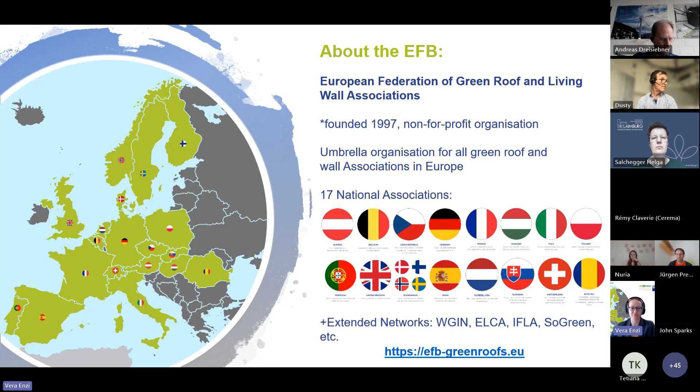General basic goals of the EFB: speak about what's going on in our sector across Europe, and help each other from country to country. We have different advancement statuses - some people are really doing pioneering work in the sector, others can easily take this information. This is one of the basic reasons why we started our webinar series, to get the information we handle internally out to members of our members and beyond.

So I'm approaching a term definition - now we're getting serious for today. Today's webinar is about delivering for the biodiversity and climate crisis. We are going to take a look rather at the left concept that you see on the screen than the right concept, but of course you will see biosolar roofs as well as solar green roofs today, as far as I am informed by the presentations. So what's the difference? We are going to discuss it also later with our experts.

In general, we can say a biosolar roof is the combination of a biodiverse green roof with solar use - it can be photovoltaics, or also solar thermal. A solar green roof, on the contrary, is the combination of a standard extensive green roof with solar, or in some cases solar thermal. That's my opening, but of course we can discuss if this definition stands, or we can further improve it during the talks.

So happy to introduce today's speakers, and very happy to let the first speaker go afterwards immediately. Today here, Dusty Gedge, EFB ambassador, after serving voluntarily as EFB president for 16 years - great that you're here today. Dusty is an independent green roof and biodiversity consultant, and today he's also going to talk about his company Gentian a little bit. What you should also know about him is that he is a professional ornithologist and ecologist, and this is also actually what he loves doing most - watching birds on green roofs.

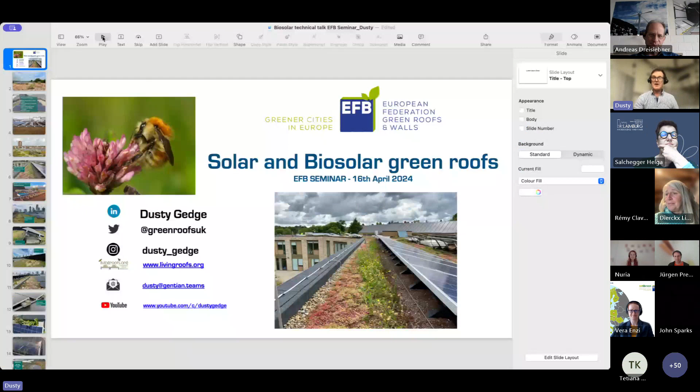So let's press play. I hope you can see that. So yeah, I'm just going to go through solar and biosolar green roofs, the difference. And there were a number of questions about retrofit and how you could assess cities, which I'm going to cover. But this is one I was involved with specifying and designing, and this is a biosolar roof up in North London. And you can see the mix of wildflowers, and you can see also some sedums. And I'm going to get into detail about that.

And the key points of the discussion: what's the difference between a solar green roof and a biosolar green roof? Why is that important? I'm also going to talk about non-integrated and integrated systems, which is pretty relevant across most of Europe, less so in the German-speaking world, but is particularly of interest beyond our shores. I'm going to talk about some of the main engineering issues, and key in my experience is who runs the design and the installation. And I'm going to talk about some retrofit projects that I've been involved with.

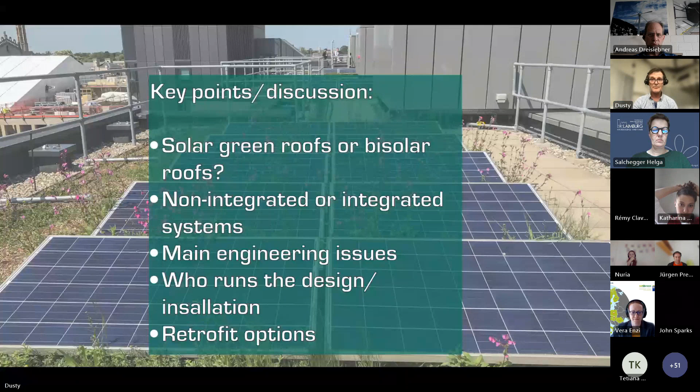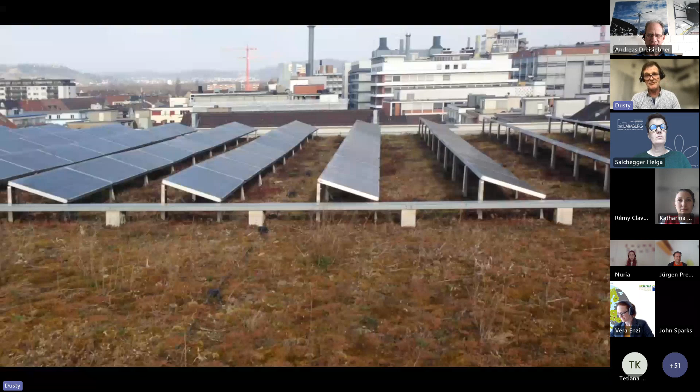So I've got to say, because Andreas is here, my first solar green roof was back in 2002, which is the Messe Hall in Basel in Switzerland. And what's interesting about this project, it was originally just a sedum roof with some solar panels on it, but my colleagues at the Hochschule Wädenswil decided to turn it into a roof that could deliver better for biodiversity. I'm sorry about the quality of the picture, but it was taken a long time ago, I think about 2004. And it was really my colleagues at Hochschule Wädenswil who coined the term biosolar. And I've got to give credit to them.

And often now, 20 odd years on, everybody just thinks a biosolar green roof is solar panels on a green roof. It's very specific about biodiversity. And biosolar roofs deliver both renewable energy and what I call meaningful biodiversity. All green roofs provide value to nature because they're green space. And here you can see that we've got some native wildflowers at the rear of these panels, as well as sedums. And that is the point of the biosolar.

And biosolar roofs in the main, and I'll come to the slight difference there, are what I call, and certainly in the GRO Code are called, integrated systems. And it's where the green roof, the solar arrays and their mounting systems are integrated into the green roof system. And therefore the green roof system provides the wind ballast and the lateral ballasting, which is needed to make sure that the panels don't blow away, essentially. And wind loading is a very important topic.

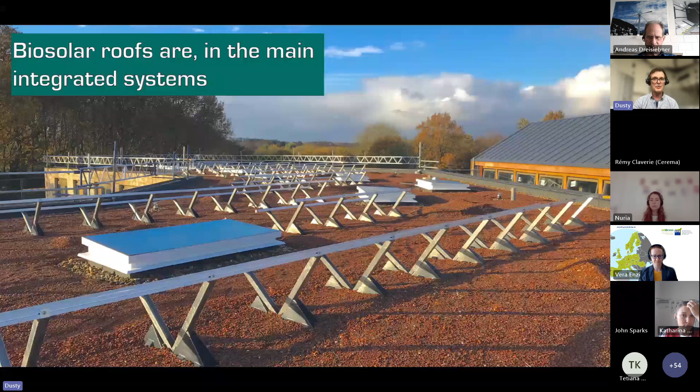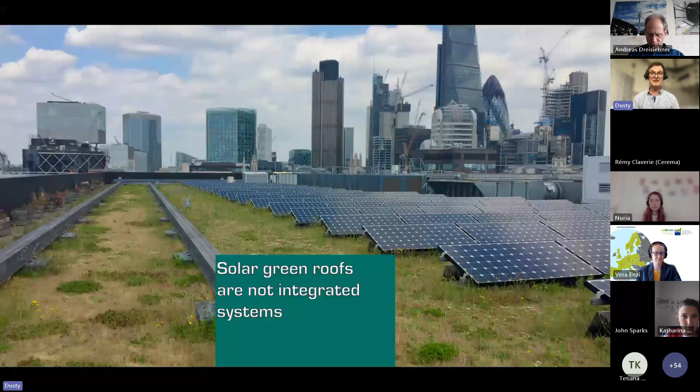Now, this is actually a solar green roof originally, and it's not integrated into the green roof system, but this is a bank in London where a very interesting man started to retrofit features onto this system that really makes it a biosolar roof. But originally it was a solar green roof, and you can see here where it's non-integrated, the solar mounts have to be ballasted with paving or shingle ballast to actually hold them in place in terms of wind loading.

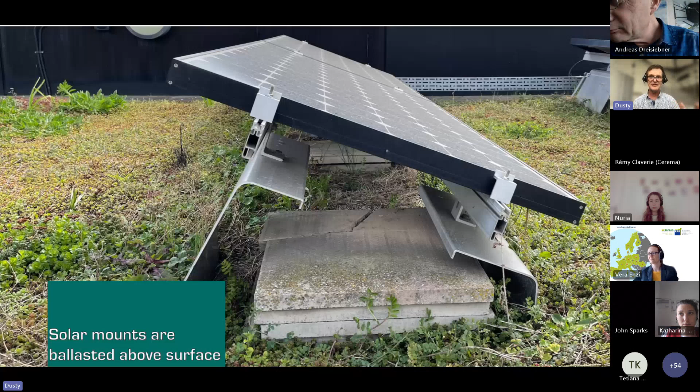And that is a very important difference, because integrated systems are generally run by green roof system suppliers with solar. But what happens is people want a green roof and then they decide they want solar. So they go out to solar and then solar put these on. And my experience is it's best that you get a process, like what Andreas does in Switzerland, that is run by a combination of the green roof system and the solar system supplier.

And as you can see, they've retrofitted these features on this solar green roof, these sand mounds, and put native wildflowers in. And I didn't put pictures in, but this is quite a famous roof now in the UK because it's got several orchid species. And one of those orchid species is actually from southern Portugal, southern France, which blew in in 2021.

And has only ever been once found in England, which is a very interesting, exciting story. And you can Google about that. And you can see again lots of wildflowers mixing in with the sedums. So this solar green roof has been transformed into a biosolar.

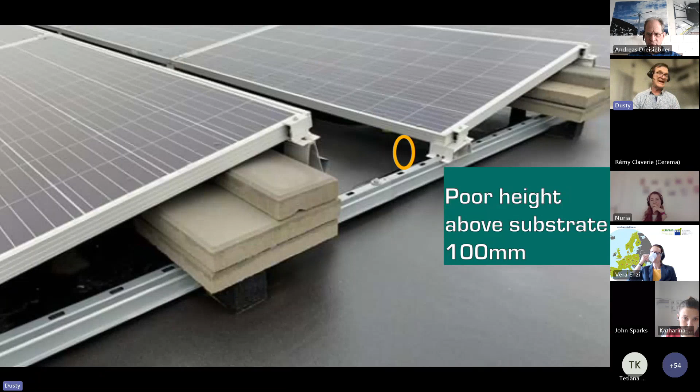And one of the other problems when you get these non-integrated systems, these are systems which are generally put on conventional roofs, is you often get a poor height above the substrate. Now, I'm confronting this a lot at the moment because the Department of Education wants all schools to have biosolar green roofs, and contractors are coming up with simple systems. And what happens here certainly is that actually this can encourage the growth of woody stem plants, particularly willows and trees, which can cause a maintenance problem.

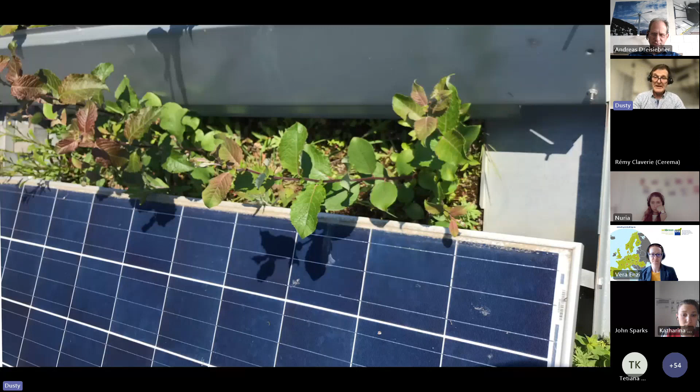And often when a green roof is designed, this particular roof was designed originally for solar, but the planning conditions said, oh, you need a green roof. So they sort of packed the green roof around it. And basically, they never produced any solar panel power because of this buddleia clouding out the array. Now, this is not because of the green roof. It's just a very bad design. And so using the incorrect solar mounting system can actually cause problems in terms of generating solar energy. And I'll come to the compromise that needs to be made later.

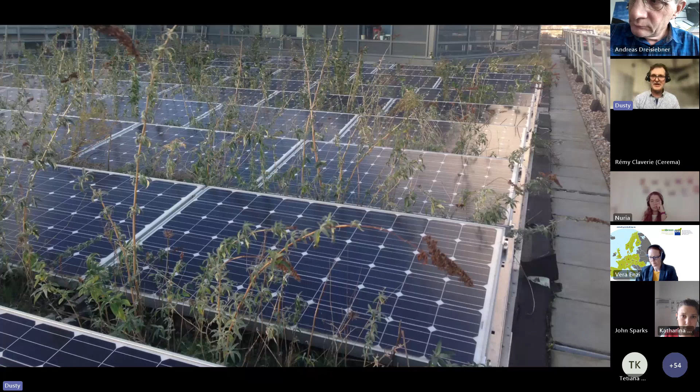Often I get asked about orientation. Generally, certainly in the UK, and actually most of the green roofs that I've seen, a north-south is often preferred. But actually, an east-west orientation does produce more energy, from what I understand. And what you can see on this one in Switzerland, again down in Sins, which I visited with Vera in 2014, you can see an east-west array, and in the far distance, a north-south array. And that can produce issues depending on the aspect, that actually a north-south is preferred because of shading by other buildings. And these east-west panels are also not integrated. They've been ballasted. But this gets into a lot of detail, which may come up in the discussions.

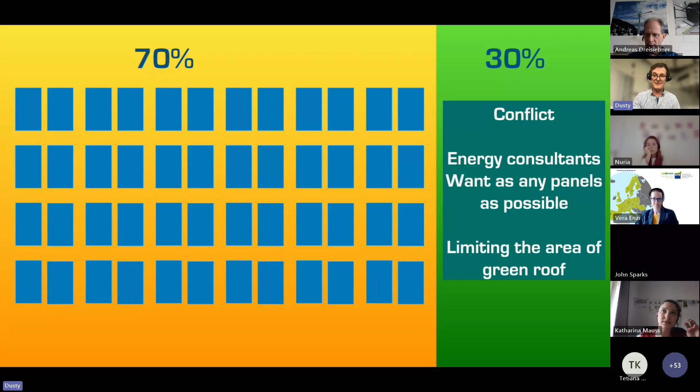One of the main conflicts we're having is that the solar guys and girls want 70% of the roof to maximize the amount of solar energy that they can produce on the roof using pitched, angled panels. And that means there's only 30% left for biodiversity. And one of the compromises that needs to happen if you want to make a really good biosolar green roof is that, for me, you need 50%. But in my code in the UK, we go for 40%.

And that means you can't necessarily generate as much electricity as you would want to, or could do from a roof. But we've got to think about the other benefits that the green roof is providing in terms of biodiversity, water storage, and cooling, which I'm sure Andreas will come to. But this is a compromise that we need to be aware of, else you get bad solar roofs fitted onto a green roof, and they don't actually produce any energy at all.

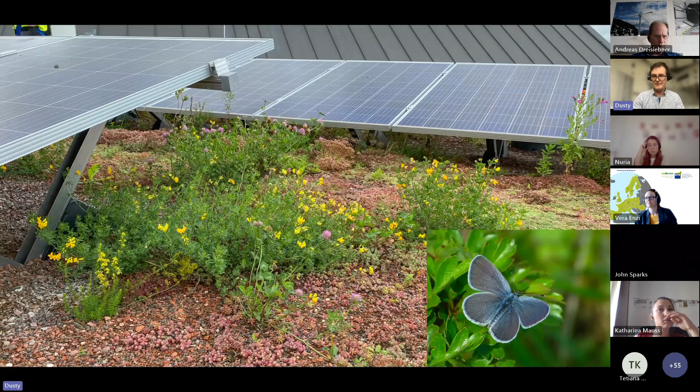Now, for me, certainly the roof that I showed you at the start, this roof, Barnet, is the first roof officially where a very rare butterfly in the UK has got a really strong colony, which is the small blue. And so the point there, we can actually deliver meaningful biodiversity. The yellow plant that you can see there is its food plant, which is the purpose of a biosolar roof.

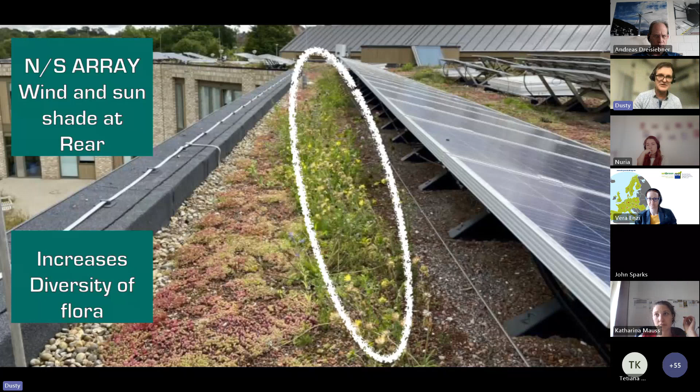And you can see here on this north-south array, as I showed you earlier, what happens on a biosolar roof with pitched panels is you get this wind and sunshade, which means you get an increase in diversity of the flower species because they are out of direct sunlight and particularly out of the wind, and therefore you get more vigorous growth, which gives us our biodiversity, which has been the focus of most of my work for the last 27 years. It gives topographical variety.

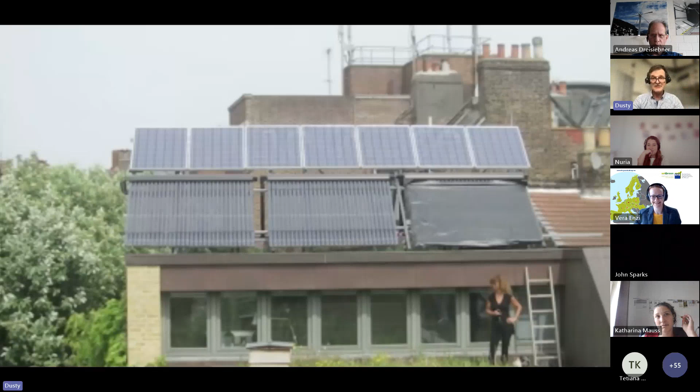Now, I've got some terrible pictures here because this is very exciting, and I know Vera is very interested. This was actually originally just a solar thermal roof, and then my colleague Justin Beer added some solar energy panels above. And I took this picture in 2011. It was a spring drought, and it's very unusual in Europe to have a spring drought.

There's a spring drought in Belgium as well. And what happened with the solar thermal, these evacuated tubes, they allowed the rain to get in when the rain came, but they shaded the roof so it didn't evaporate so much. So this roof actually really survived the 3-month drought we had from February through till May.

And again, I'm very interested in this solar thermal process. And if you're interested in this, I took these pictures from a video I made. I think it was in 2011, so it's up there if you want to find out more about it. And you can see here the plants will grow up through the evacuated tubes and have no impact on the production of the hot water that these tubes are meant to produce.

But essentially, one of the things that is known, and I know from a document that was given to me in 1999 from the city of Karlsruhe, is that actually when you've got vegetation and soil on a roof, it can actually help cool the panels down because they can get quite hot in the summertime and make them more efficient.

And I know one of the questions, is there any research on this? There's been recent research, I think it was about 3 years ago, in Sydney that shows there's about a 3.8% increase in energy production when a solar panel is placed upon a green roof. But again, I'm sure Andreas will go into how he's producing 10% more, because I know about that.

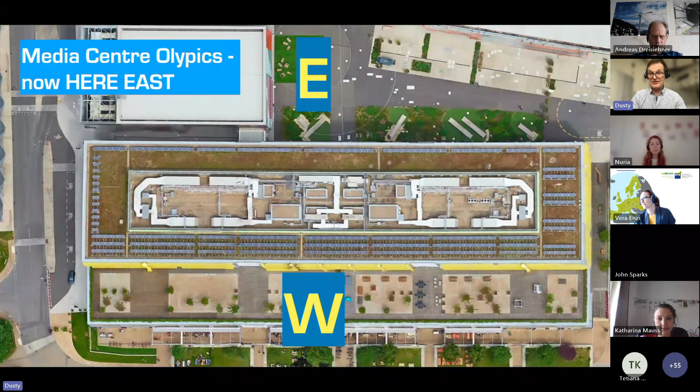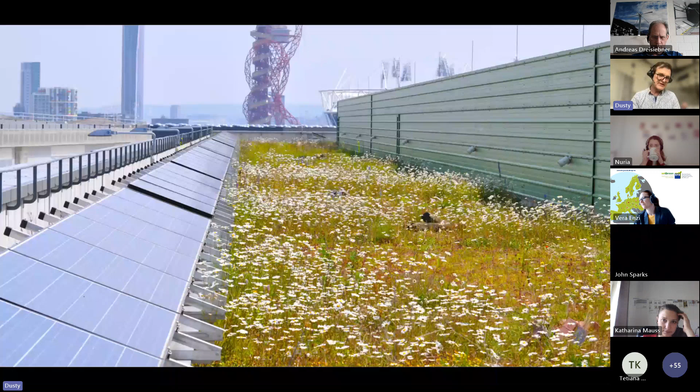A quick couple of retrofits. This wasn't a retrofit. I put this in first of all. This was the Olympics Media Centre back in 2012 in London. It's the largest solar green roof in London. And originally it was just meant to be a green roof for biodiversity. And unfortunately they were missing their solar target. So they forced solar panels onto it. And it's actually a very weird construction.

But the point here is this roof has actually met, out of the 12 biodiversity targets, 9 of them, which even the Olympic Park does not achieve. And in fact, it's got breeding birds underneath the panels. So that's actually to celebrate how we can deliver biodiversity using panels.

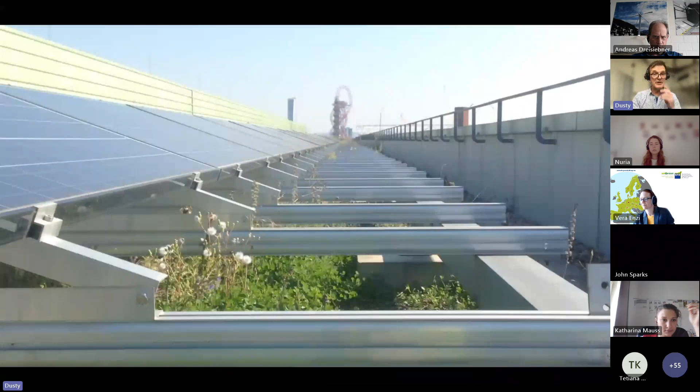So this is the David Attenborough Centre. We had a weight constraint here of only 100 kgs per square metre. And therefore, the architects decided to use a non-integrated system. And it actually works reasonably well, but there's a maintenance issue because of the woody stem plants. And you can see where the solar panels are. The building on the left is actually a new build, but the building in the main is the David Attenborough Centre. And that was a 1960s building which had pretty weak loads.

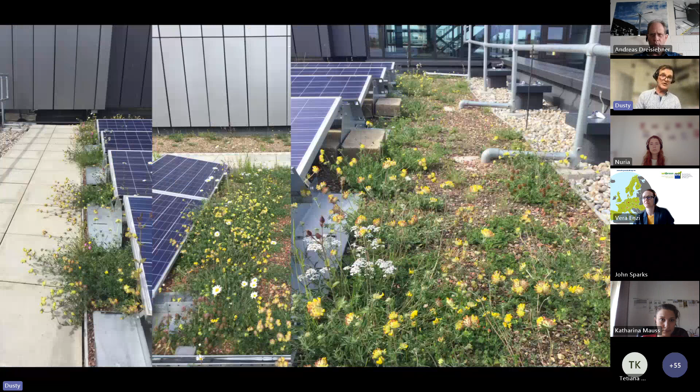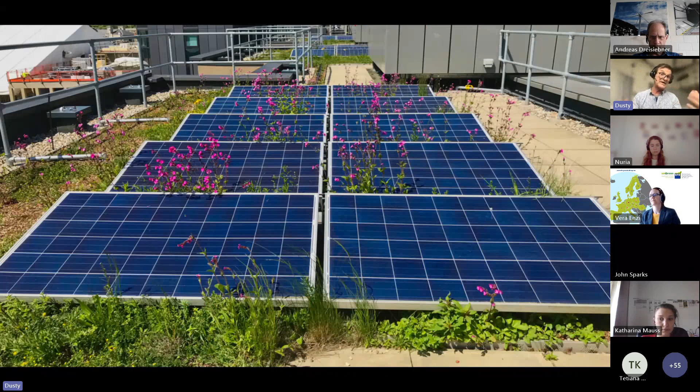But you can see actually we got a lot of good wildflowers growing, and even the wildflowers are growing up in front of the panels, but they haven't had any impact on the panels. It's actually the woody stem plants that have impacts on the panels, and they need to be weeded out. And maintenance is far more a problem on these non-integrated systems than on integrated systems.

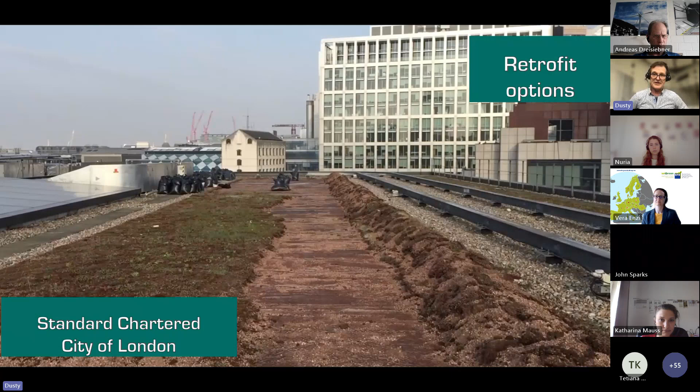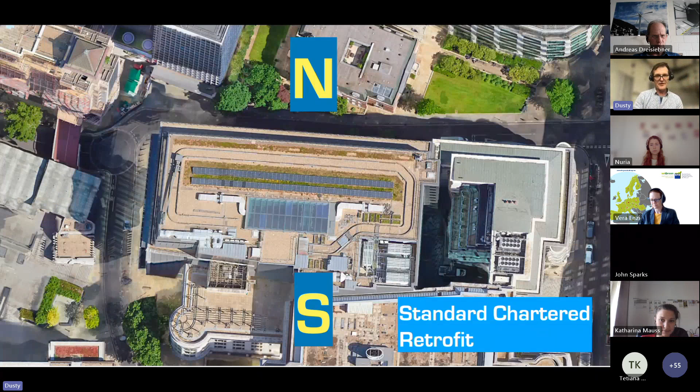So this is another retrofit, which was originally an 80 mil sedum roof on Standard Chartered, which is right in the centre of the City of London. And this is during construction. They removed the sedum, and then they added it. Sorry, I got out of turn. So there you can see the roof from Google. But what they did is then they added these integrated panels from one of, at the time, only 2 suppliers of these panels. This one's particularly ZinCo. And then they added substrate.

And what happened? The solar guys came in, added the panels, and what happens now is this roof has got much better biodiversity than it had before, because it was a pretty poor sedum roof. And therefore, the question of solar or biodiversity, if it's done correctly, you can actually benefit both systems. And actually, these are probably producing about 3.5% more electricity than was anticipated, the facility manager tells me.

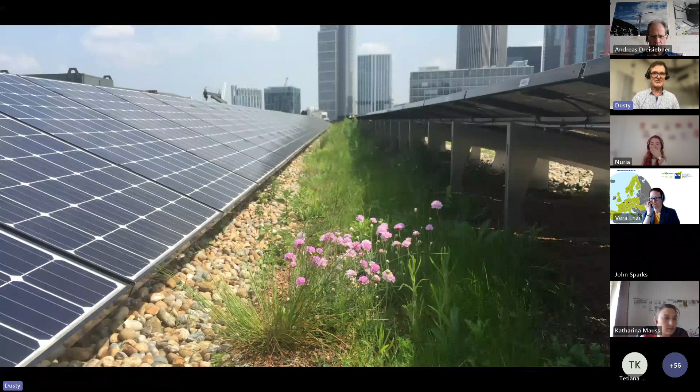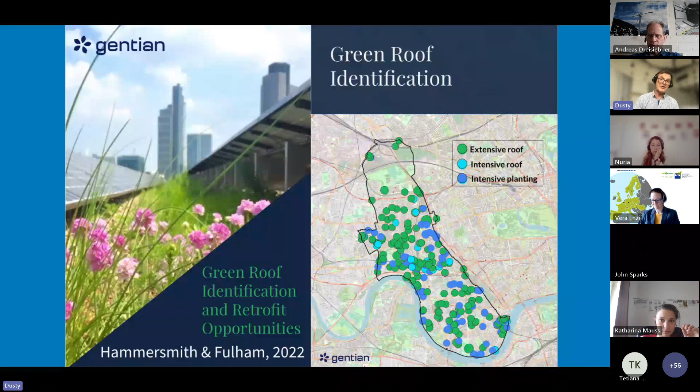Very quickly, somebody asked about mapping. I've done a lot of mapping manually in my life, but I've set up a company to do it. We did some work in the London Borough of Hammersmith and Fulham, which is an inner London borough, where we mapped all the green roof opportunities, we mapped all the retrofit opportunities, and we also did some work that I'd done from another London borough. We worked out where there were biosolar opportunities to put reasonably good biosolar roofs up, and what energy could be produced over the London Borough of Hammersmith and Fulham, which is about 25 square kilometres in terms of land area.

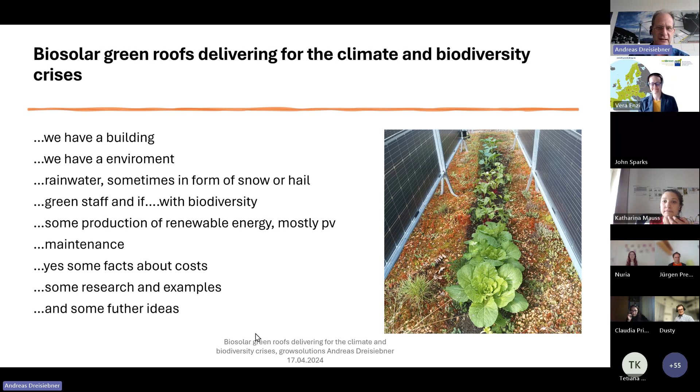Let's show you a little video, why, it explains a lot in a very short time. We have a partner called SolarEdge.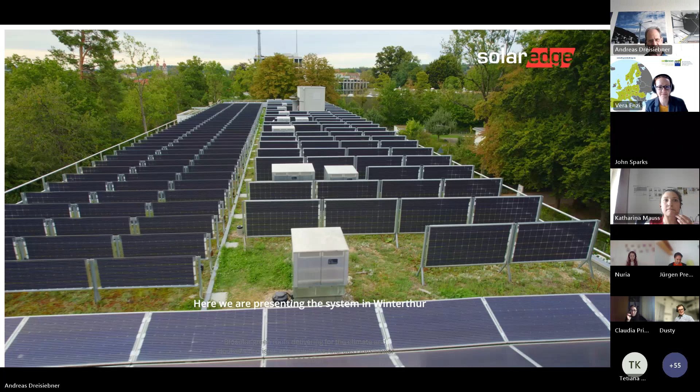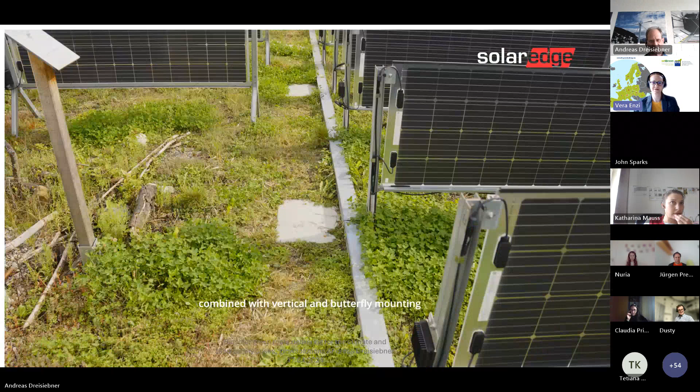In case we are meant to hear noise, we can't. I'm just informing you, Andreas. What? You cannot hear the sound? Yes, maybe you can reshare the presentation and then select the include sound option when you share. I'll try. Or maybe it's best you just comment on what we see.

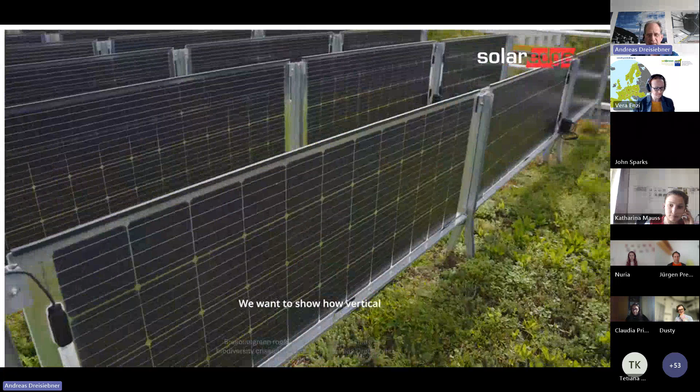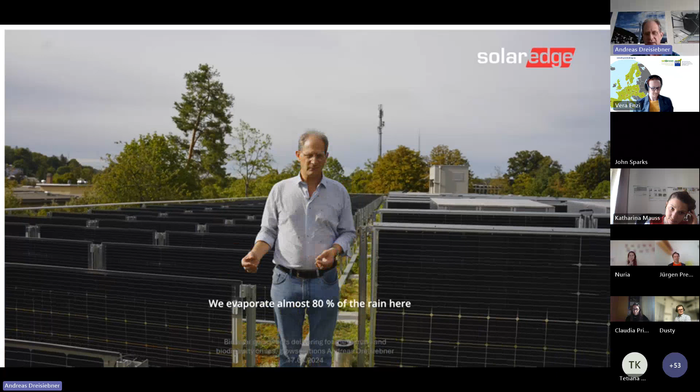Okay, what we see, it's everything written in English. We see the combination, and we see also what we have done together with the university. I'll explain here. Together, we were supported by the Ministry of Energy at the federal level. We combine it, sometimes using the same modules, glass bifacial modules, in the classical way and in the vertical way. We also have to face the rainwater management, we can evaporate and transpire the biggest amount. We also do, yes, why not, urban gardening. We have some insects, we try things with other flat roofs, and so on.

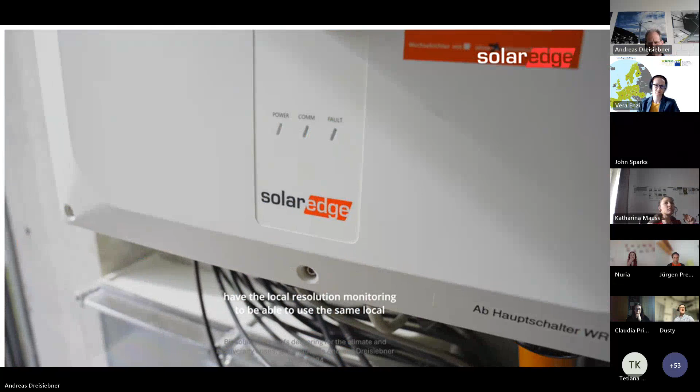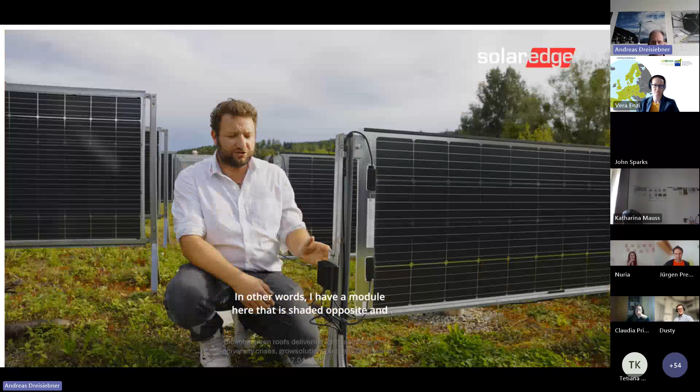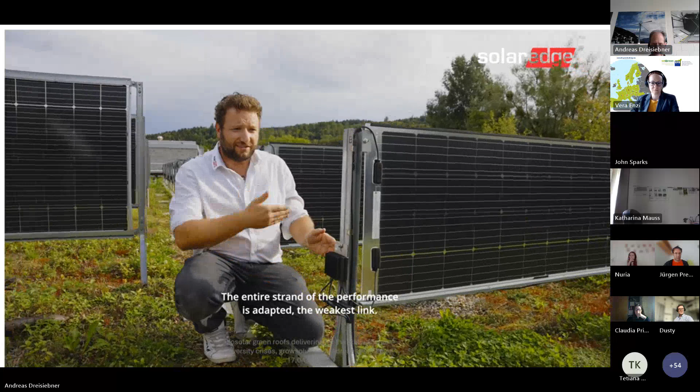We work with technologies which give us the opportunity to see the absolute details about the modules and their influence, and of course to collect as much as possible of the kilowatt hours with these optimizers, the best we can.

But let's go. We have something done, and first we have to face the building. Why? We have a little description here.

When we have a green roof, of course, we know we have cooling down. You see, down to 35 degrees difference, not up to 100 degrees, in Middle Europe conditions. And if you have a more extreme, more continental climate, you have the gap much higher. And this makes a problem to the roof, the cooling effect first, but then to the rooms.

I learned from my Indian engineer, who brought me to renewable energy 30 years ago. He told me in India, when we can cool down the top rooms by 2 degrees, we save 20% of cooling energy. And you know how much air conditioning is installed more and more each year, then you see it is not nothing, it is something.

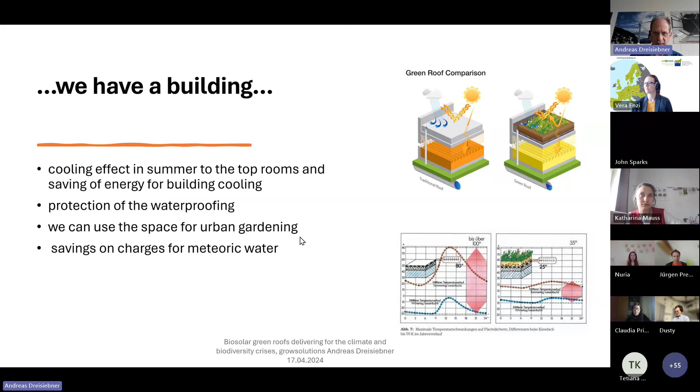Let's go. Come on, it will not work. It's hanging, so no. Now it's going, okay.

Then we have the environment, the urban heat island effect. Of course, we know it. We have to store the water, Sponge City, and we are against the desertification of cities. We know cities like Berlin have had 5% less rain every year for the last 15 years. It's not funny, it's a green water city.

Just to face the reality, evaporation and plant transpiration is very, very important, free of charge, I told you, also for the building but also for the environment. And of course, we know green absorbs a lot.

So I have to go out here. Yes, the rainwater—we have to transpirate and evaporate it. It cools also a little bit the modules. We tested this nearly 10 years ago. This effect, it's not really big, it's less than 1%. Believe me, we have millions of data points.

If you want to know more about the cooling effect, we can send you our research. We have millions of data points, and it was not a big advantage booster, it's really less than 1%, it's not that much. The big advantage is that evaporation and plant transpiration also help with rainwater usage.

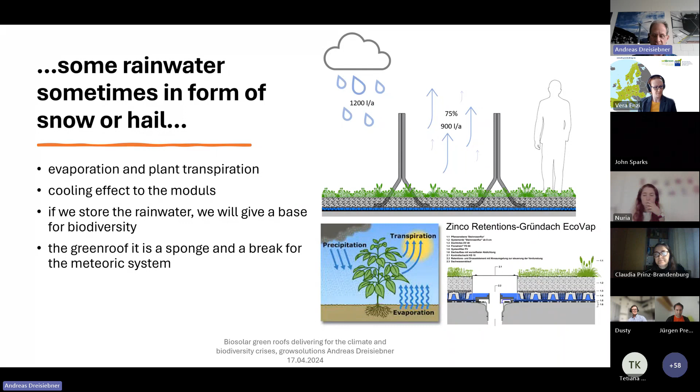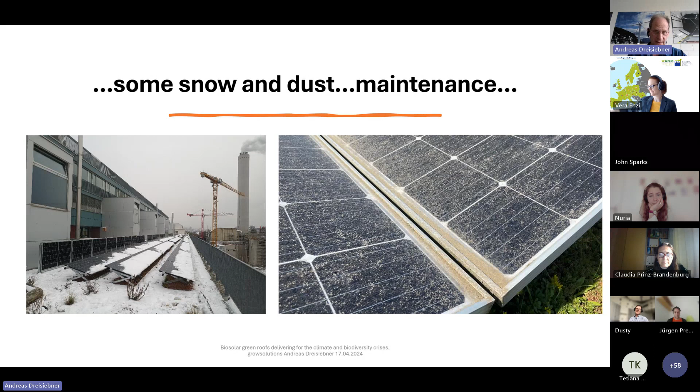We have some snow in the city too, like the picture shown earlier, in the middle of Zurich. Maybe 2 or 3 days of snow, I agree, but we have another growing problem: Sahara dust. It's not a huge amount, but it sticks, and this requires maintenance. It costs money and reduces production.

An important point: in Switzerland, not all roofs are green. Sometimes they're dry or poorly maintained green roofs, and in summer many are brown or red, not green. Minimalist roofs are one solution, but they do nothing for biodiversity, and the plant selection matters for insects too. We see moss, sedums, and now a new neophyte - we call it the Berufskraut, a Canadian plant - but it doesn't create the connections or the plant groupings we'd like to have.

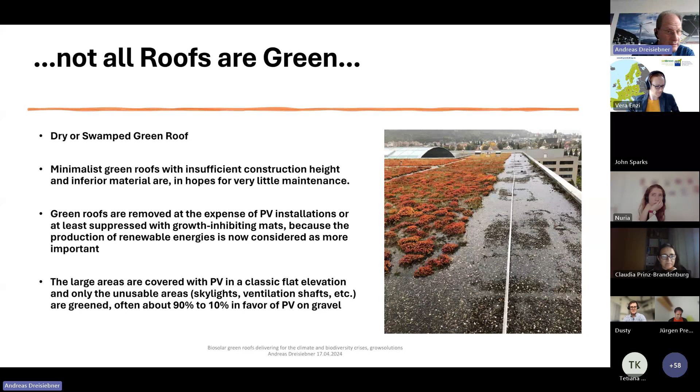Production of renewable energy shouldn't be treated as more important than everything else - we just have to be smarter about it. Large areas with classical tilted installations are often 90 to 10 percent. From a bird's eye view, you see a black roof with just a little green around it. We need to think more about this and make it smarter. And we do have solutions.

Now let's go to the energy side. On the left, you see the dynamic price development per day in 2023. The baseline shows the hours of the day - you see that in the morning we need a lot of energy, and again in the evening.

On the right side, you see the radiation - the Einstrahlung - from what we produce with classically installed modules. The green line is the classical south-facing installation, east-west is a bit flatter, and the red line is the vertical installation. In the future we can't just look at the yield per year in kilowatt hours - we have to look at the quality and timing of those kilowatt hours, to see which one better matches demand.

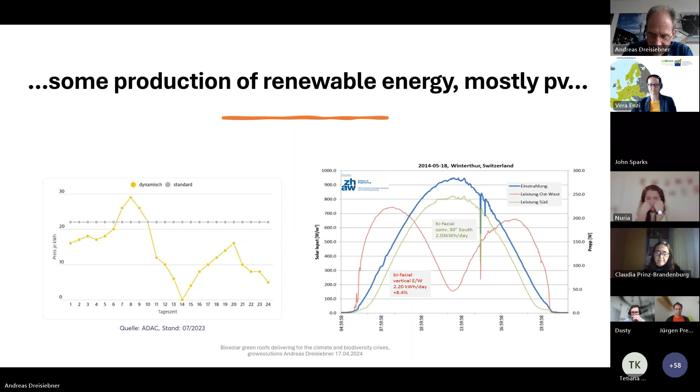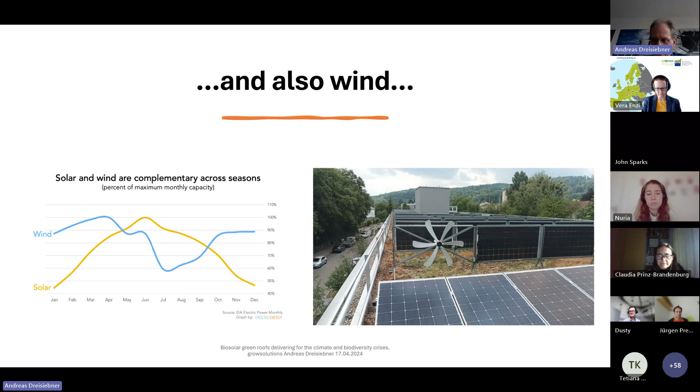We just started a study to find the potential for small wind turbines in Switzerland, with different turbine types. This particular type is made in Switzerland, with 12 patents on the back - not pending, but granted. This is something unique that we can show, and we want to integrate it into solar roofs in the future.

Now something about maintenance - I told you, it's a killing argument. In Switzerland, we calculate one day, one man, 1,000 Swiss francs. That's a lot of money. Sometimes we have to go up and clean the roofs, and if we can avoid it, it won't need to happen 3 times. But if this rainy weather continues, we have to go at least 3 times. It can cost a lot of money, and the cleaning really strips away the green growth.

Here we have an adapted Husqvarna normal lawn mower, but we found out this isn't really possible to adapt properly. Now, together with the Swiss Agency of Innovation, the state agency, we have support from a university to develop a unique mower that cuts higher, so we don't have restrictions on the cutting level. We'll go up to 15 to 20 centimeters - the construction must be started at no less than 30 centimeters. And we will have the first woman or man on the roof with a camera, including an infrared camera.

They can make pictures also if there is a problem, then we can send him directly to this point, this panel, or this optimizer. First, he will cut and do it nearly free of charge for the future. That will be ready, and we make the first tests now in spring, and that will be ready in a year to sale.

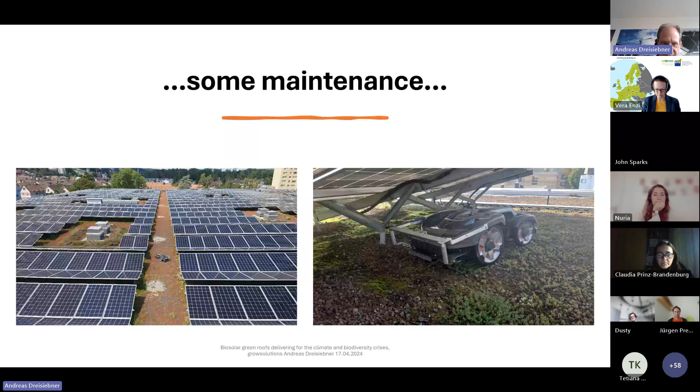Just to see we are facing the realities. Now some facts about costs. I see in the chat that a lot of questions are coming about that. Okay, we have these two systems.

Why do we make the butterfly? It's easier to clean than the classical one with the roof, classical roof form, and the vertical, these two lines.

One, it's clear, we have to face which type of roof we have. Is it an existing roof, a new roof? How is the dry layer, the waterproof protection? How old is that? These are always very important things before we start. Yesterday I had a question from Italian ones, and my first question was, how old is this roof? They said 10 years. I said, it's good to know. Then we go up and install something on a roof that's damaged in 10 years. What will you do? Only costs and not necessary discussions.

Then a very important thing, I show you the green roof system, with rainwater storage or not. It's possible - if 6 centimeters means extra 60 kilos, maybe, maybe not. We have to find out.

And then also the butterfly or vertical, you see both on the picture. We can also mix it, why not? The static calculation is very, very important to do. Quality and green, biodiversity, urban gardening - what will you do with this roof? It's partly intensive use or only extensive.

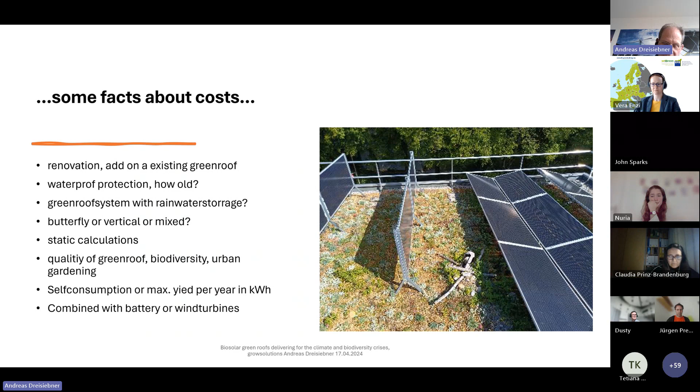And you see here some silver leaf plants - you can imagine what happens with snow. The albedo effect, the reflection, it's another one, and we have to face on the space exactly this influence. Then we can go closer and install the same amount, but we will still have a little bit less - less than 10% of production on the same space compared to a normal installation. And we have another seasonal effect - we have more in wintertime in our conditions, and it's also brighter through the day with the camel form, compared to the dromedar.

Some research, just to show you a little bit, when you'd like to know it we can send it to you. Some is in German, some is translated of course. We have done it, the cooling effect - you see, 15 some years ago, we know what we do. We have really done it very intensively over 3 years, I told you.

Then we have the first vertical roof. I have seen it on pictures also by Vera and by Dusty. I'm happy to see that it was our first vertical roof - it goes around the globe. That is really funny. And you can see, if you want, you can see it also in winter when you will visit me. That's no problem.

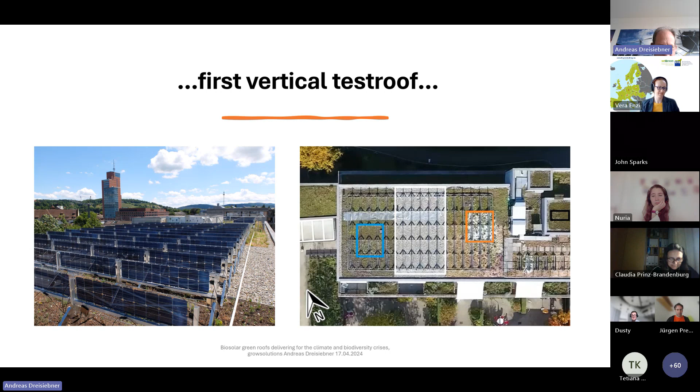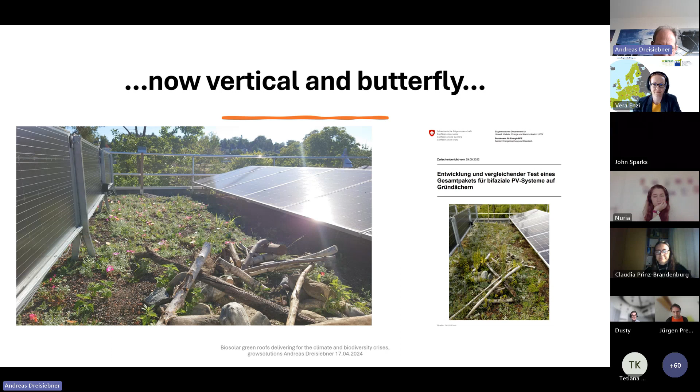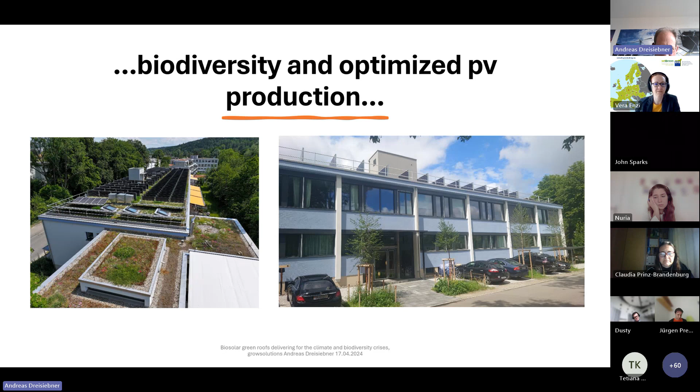We tested different types of surface - the gravel, the white gravel, or a classical green roof part. Now we are on the roof they call Mattenbach. We tested different things with some biodiversity islands, the classical installation, and so on. And you see here we try also to find out about biodiversity. We work with biochar, we work with different things, beside the big things which we of course tested. You see also how it looks - look here, there are vertical and horizontal lines, and we go over the roof with the same lines. There's nothing strange compared to the other parts of the building.

Let's go, some samples to show, pictures. Yes, we show what we have done. This is a hotel.

You see also the lines of the hotel, vertical and horizontal. We go over the roof. It looks great. First they told me it's not working over that space, and then, oh, it is working. You see, it's really nice. You see here the picture.

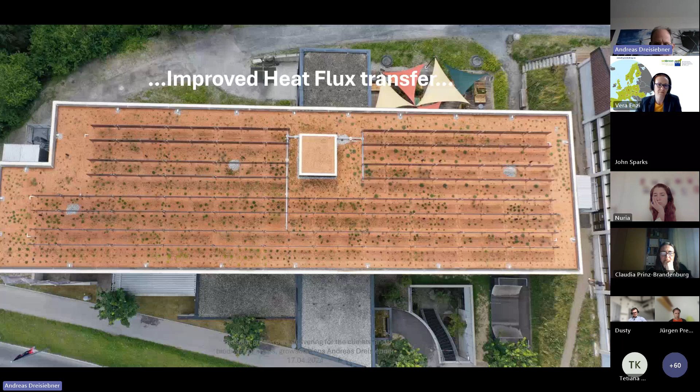It was on a very new stage. It's not very green, but it's much greener now. I have to change the picture, but you can also see it. Then we have done...

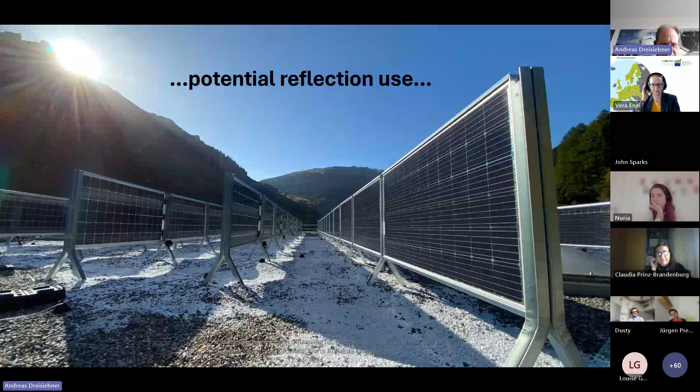which we have installed there. You see, you can imagine what happens when we have snow. You can also imagine when you have dust for certain regions, which is thick. I think in Dubai, as example, I know they can have fog, very intensive fog. And then you have a similar problem. You have to clean it. The vertical one, you have not to clean.

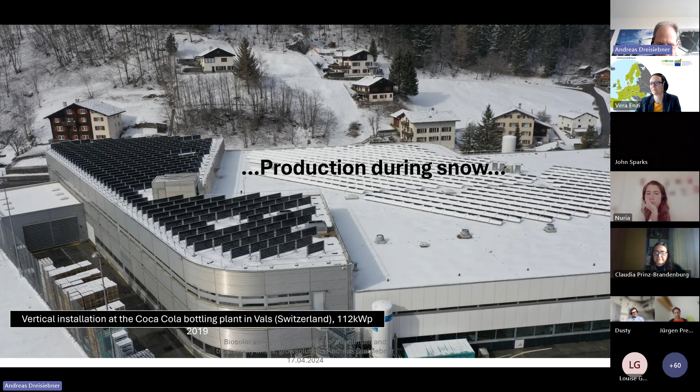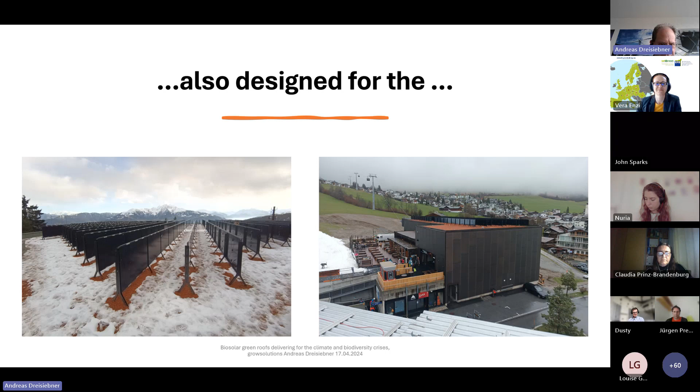Then we do the classical things too. Yes, we do it. On big roofs, we will do more in that direction. You see what I told you? This is a black roof with some green sidelines compared to the vertical installation. You can combine it. Why not?

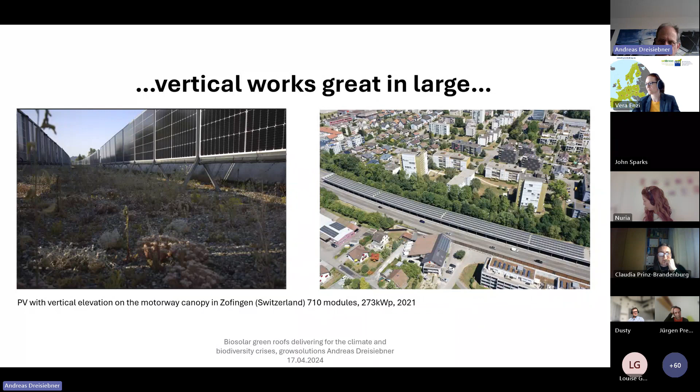It's not forbidden and it's possible. Then we can also do big things. It's over... not a bridge, it's a silent noise construction for a city over a highway, a big one. We can also work with existing roofs. We take away partly and let the rest in from the green roof.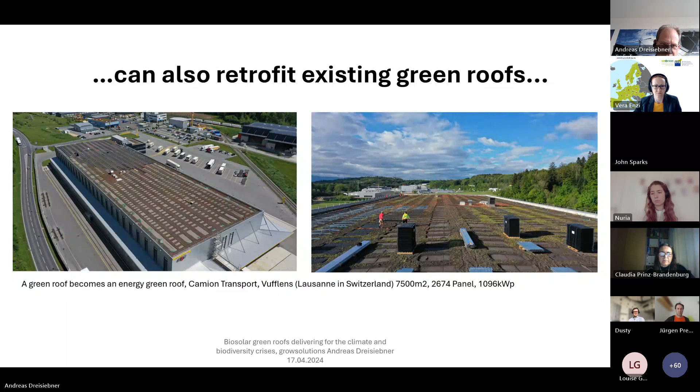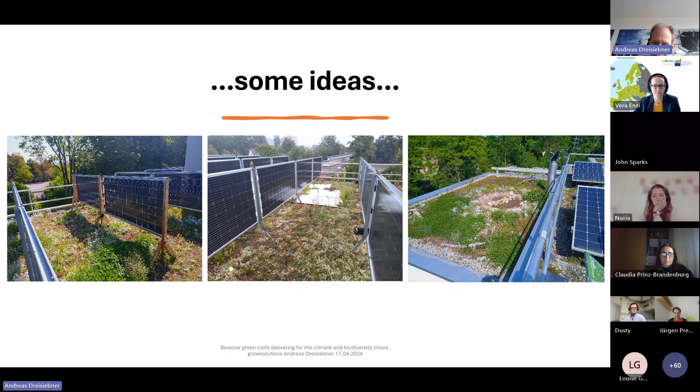No problem. We go more and more also to metallic roof in future, to classical storage with vertical, not roof parallel. We have ideas, and we want to make a higher value for the biodiversity with some ponds, with wood, with sand, with other parts for our little friends, the insects, mostly.

The next step is then to install the modules over. Yes, we have permanent development, and we go to cost reduction, testing of materials, footprint reduction, cooperation with partners, and with local partners, with partners in other regions. We are open-minded, and we are a team. We have a lot of experience, but we really are still in the process to be better, and to design the better solutions together with local partners like you to find how we can do that.

Then, just to show you a little bit what we do next. On the right side, the start, we have in the east of Switzerland, we will test, we go more narrow, we go to 1 meter, and we change completely. Normally, we go on the north-south axis with the installation on vertical. Now we go completely the other way to find out in real time, not simulated by software, real, how it is working when we do that on the wrong side. How much is the difference? How is the profile working? And also the shading effect when we go from 1.50 meters down to 1 meter.

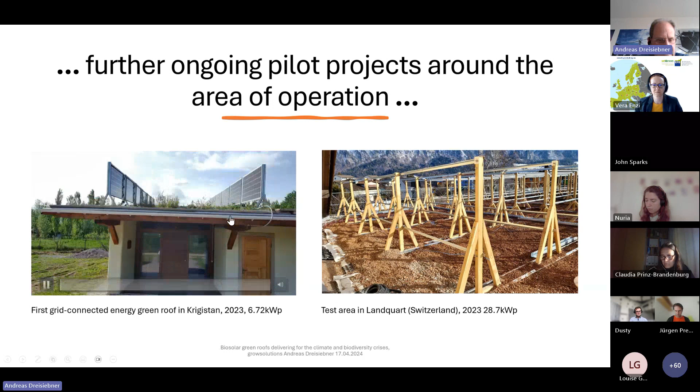Or we go to other regions like here. You see, this is in a continental climate country in Kyrgyzstan, on a handicapped school in a village. And you see here, this room, first they were very skeptical with the green roof. We take a minimalistic green roof, why it is a little bit brown. And they find out that room is the warmest room in winter and the coolest room in summer. This is a passive house, energy-wise really modern made, with Swiss knowledge from a Kyrgyz architect, which is developed in our region in Switzerland, and they make the construction in that way that they have sun. They have a lot of sun in summer and in winter, but with the big roof over, then we have shade in summer and open, and the sun can go into the building.

You will see it now from that side. This is the south side, so that it works as efficiently as possible together with clay walls. Really fantastic project. Let's see it here.

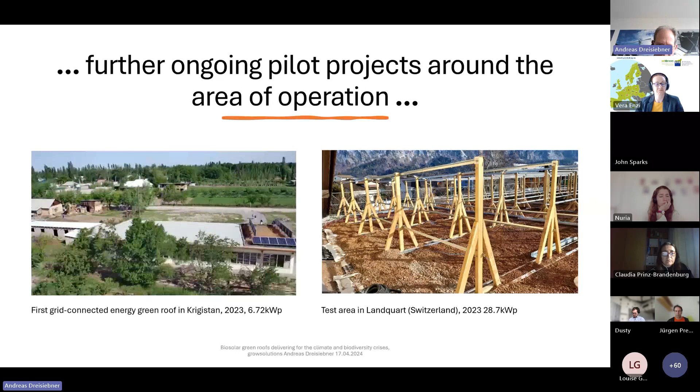Okay, let's go. So then a little bit about the partners which we have. We have research partners. We have Solarspar. This is an association which we started the research with, and of course we have the turbine company Webfair and our partners for the lightweight roofs.

What we do is we go smart. You can download my presentation. Then you see whatever we do, we can face the yield. We can do other things. We do it for the city, for the mountains, continental climate, or sandy coasts. We have the solutions for that.

I think existing green roofs, retrofit, cost efficiency, resource-saving manners, and of course the stormwater management, evapotranspiration, it's a part of the solution. Biodiversity, it's more than nice to have, please. In addition to PV, small scale wind is also a complementary partner for energy green roofs. We do it also for small things.

We can use the vertical as a fence. It's allowed in Switzerland to use it. We can save space, and also we can have a better usage of the space. In addition to PV, the small scale wind turbine is a really complementary partner for the building.

I told you it's the cooling effect and the saving, and for the urban climate, we have to face the urban heat island effect. So thank you. These are my friends from the south who helped me a lot with these lightweight solutions. And back to Zurich here, we have the mixed roof with biodiversity islands and such kind of things.

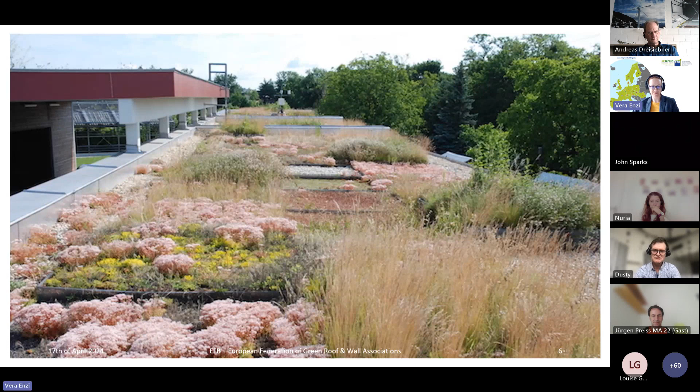So what we can see is the substrate, the quality and the build-up, and of course, its potential to capture and offer water and root space to plants is always in direct connection to what grows on it. That's very simple, but it's very important to know and also memorize once you appear on your first, let's call them accidental biosolar roof, when somebody put a lot of solar panels on actually an existing old green roof. So this is what matters. Doesn't matter what project, you should always keep that fact in mind.

So what follows, maybe 2 other statements. We can go into direction of nature conservation and biodiversity on roofs. We're already doing that for a long period of years. We've been to roofs across Europe that are far older than 100 years already, and are inhabited by a very interesting mix of animals and plants. Sometimes we can mirror the landscape on the roof, but sometimes, this is the picture on the right side, it's also time for you as a consultant to realize, maybe this building or this project is not meant to combine. It's meant to separate for the good, because it has the space and it also can bring different qualities.

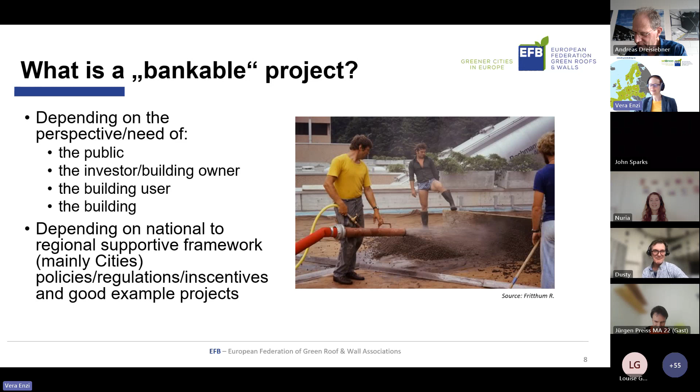Does anybody have a clue from which decade that picture is? Looks 1980s to me. Great. Dusty won the first prize today. Yes, actually, it's the year when I was born. There is another deep connection of myself to that picture.

The public perspective. This is an old slide used a lot of times. Most of you will know it. So yes, what are green roofs about, and what are also biosolar and solar green roofs about? It has not changed. We are contributing to urban green, to biodiversity. We do stormwater backing. We do noise reduction. We do cooling through shadow or evaporation. We improve the air quality.

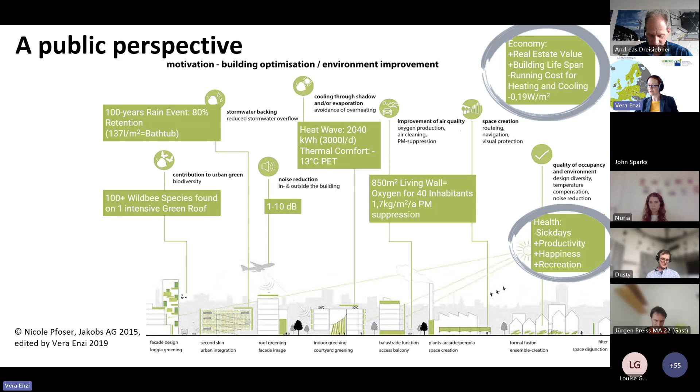We do space creation. We raise the quality and occupancy and the environment in general. We contribute to the building's economy, real estate values, the lifespan of the building, reducing the running cost. We contribute to health and well-being. People experiencing less sick days, get more productive, more happy, more recreative. So also a biosolar roof does all of this, and really, really well.

This is a picture I took from the solar guideline of the city of Vienna. I'm going to talk about this in one second also, because I think it displays quite well how a building benefits from a biodiverse green roof and from a biosolar roof, and how also, of course, the owners and users benefit. So a building has certain needs, technical needs, especially in times of a changing climate: temperature control, light control, ventilation control, preferably no additional air conditioning units, producing electrical energy in an efficient way, water

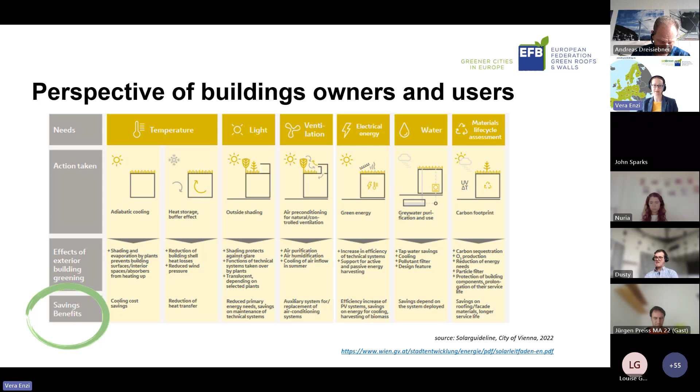management, and also looking into the future and all the efforts being done in Europe at the moment to renovate the stock of buildings we have and transform the whole direction our current construction industry, which we are of course part of as well, is going to go. So in case you need good arguments for your project, here are certain savings and benefits. And there is a huge amount of research projects for different situations proving all these benefits. So if you're interested, just get in touch with the EFB or the national associations that for years have been publishing the latest results of research.

Now coming to a national perspective, a very Austrian perspective.

Dusty will say, Vera is being Austrian today again. But I love to. I'm sorry. This is how it is.

So actually, this could also happen in your country. So this is my cooking recipe. A few years ago, we realized we have a problem. We got all these great green roofs that we installed thanks to a lot of cooperations over the last decades. We got technical standards in place. Basically, everything's going well, but suddenly we're doing bad projects and we have a lot of inquiries coming. So we looked at the cases, and we thought, okay, most of the time, this is the problem because our industries are not cooperating well.

So what we actually did in 2020, and I think this was quite a clever and good move, is as the Austrian Green Roof Association, we published a green industry position paper, because the Solar Association also published one in the same year. And we said, we are not going to fight for the same space. We want growth for two industries now. That's a tactical or political move, call it how you want. But it was actually quite interesting because it brought us into discussions.